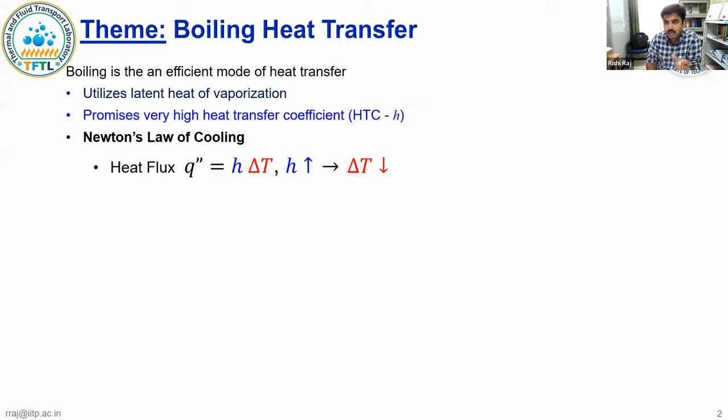So the theme is boiling heat transfer, and it's very clear to all of us that we primarily work towards Newton's law of cooling, and the whole idea is to increase the heat transfer coefficient such that we can dissipate a particular amount of heat at very small temperature differences. In this regard, I don't need to prove to this community that we get the highest possible heat transfer coefficients using phase change heat transfer such as boiling and condensation. There are many applications about which also I may not need to brief this community.

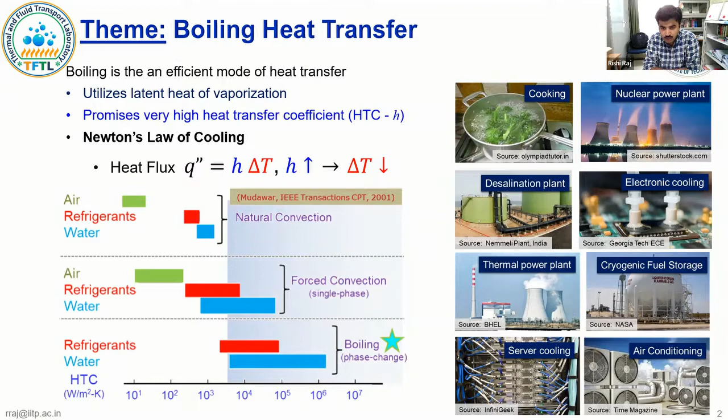So let me directly get to the point, and the point is the boiling curve and the boiling regime. We are very familiar with our typical boiling curve and the heat transfer coefficient curve at the bottom, which is the heat transfer coefficient on the y-axis and the wall superheat on the x-axis.

Typically we characterize our boiling regimes as natural convection, followed by onset of nucleate boiling, and then the nucleate boiling regime up to the critical heat flux. Beyond the critical heat flux, all of us are very familiar that we have a thermal runaway, and many a times this is not desirable, or in most times it's not desirable, because you lose the advantage of the high heat transfer coefficient mentioned in the previous slide, and obviously there are failures due to thermal runaway.

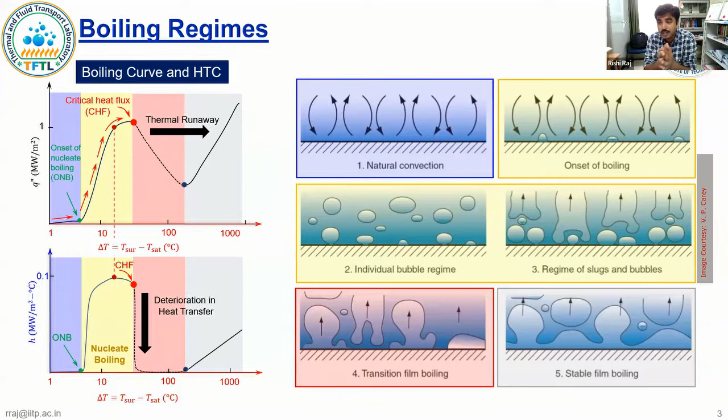The actual nature of the boiling curve in the transition boiling regime depends on what boundary condition you impose at the heater surface, whether it's a constant temperature boundary condition, constant heat flux, or something in between, like the case we have where we have a large thermal mass.

Most of us are working towards the fact that we want to be in the nucleate boiling regime, and we want to do two things: maximize the heat transfer coefficient that we see in the nucleate boiling regime, and extend this limit, the critical heat flux point, so that we can get the advantage of the high heat transfer coefficients up to very high heat flux.

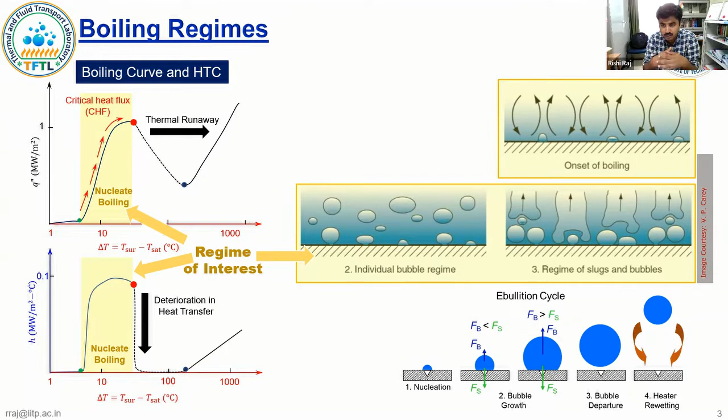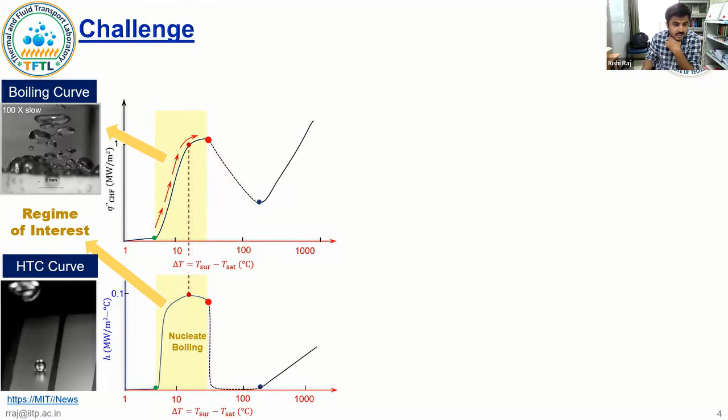In this regime, primarily the heat transfer is due to the ebullition cycle, which is the cyclic process of bubble nucleation, growth, departure from the heater surface, and rewetting of the heater surface. The same is shown here, where we start with ONB, then we have the ebullition cycle, lots of bubbles nucleating, forming on the bubble, departing from the heater surface. There are other events such as coalescence, and this is primarily responsible for giving us the high heat transfer coefficient until we encounter thermal runaway due to critical heat flux, where we primarily have a vapor blanket covering the heater surface.

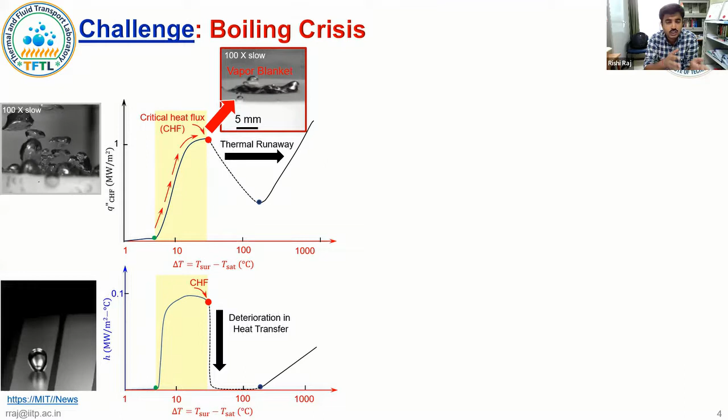The fascination with increasing the critical heat flux, figuring out when it happens, whether we can predict it, and trying to achieve the high heat transfer coefficients during boiling has kept it still as one of the most relevant topics in thermal heat transfer.

I did a survey sometime last year, and we figured out that there are at least 3 Scopus-indexed publications every day as far as boiling heat transfer is concerned.

If you want to guess why that is the situation, look at this plot, a nice compilation by Moze et al. in Applied Thermal Engineering, where they tabulated data regarding critical heat flux and wall superheat for boiling on a normal polished copper surface with water as the test fluid.

What do we see? The heat flux values reported in literature vary from around 500-600 kilowatts per meter square to even 1600 kilowatts per meter square, or 160 watts per centimeter square. Similarly, the wall superheat varies from around 12-13 degrees centigrade to maybe 37 degrees centigrade.

This is primarily the reason we are still so far behind in boiling heat transfer. It's very difficult to predict at what heat flux the boiling crisis will be observed, and at what temperature. Considering that a boiling crisis is an issue where after that you don't have control of the thermal transport phenomena, trying to figure out where boiling crisis happens, or just delaying it, has been the state of the art of research in this field.

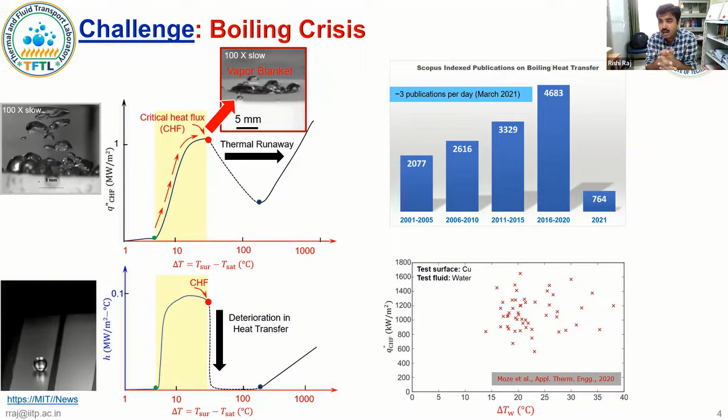So if we try to recap why we have so much uncertainty: all of us attribute it to the fact that boiling is really a multi-scale problem. We have to go from the size of nucleating bubbles to the size of the heater surface, which can span 3 to 4 orders of magnitude.

Boiling is sensitive to a large number of parameters. We have fluid flow, heat transfer, multiple phases involved, which makes the whole thermofluidic transport associated with boiling complicated. It's also very sensitive to practical subtleties. Many times we do experiments in the lab, and if we're not careful with contamination and other issues, the heat transfer numbers we get change significantly.

There has been a nice compilation by Professor Mudawar, who showed that if you use correlations like the Zuber correlation or Professor Kandlikar's correlation, which corrects for contact angle and inclination, and other correlations too, the best match you can get between experiments and predicted heat flux is typically of the order of 40 to 90%, meaning the uncertainties are very large.

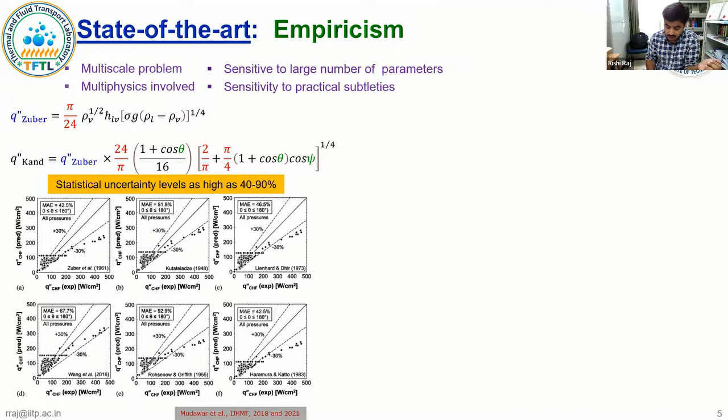Since we are not able to well characterize the boiling critical heat flux, we cannot pinpoint a heat flux number or a superheat number. So the approach has been: let's delay the boiling crisis so we're sure we're away from critical heat flux and can operate in the high heat transfer nucleate boiling regime.

There has been lots of work, and I can't do justice citing all of it, but primarily the principle is to use fancy micro/nanostructured surfaces, with the idea that you can improve rewetting and achieve higher critical heat flux as well as higher heat transfer coefficient.

But the issue is that while you're delaying the boiling crisis, the highest heat transfer coefficient you typically get is towards the critical heat flux itself. So you still can't operate in that regime because of the uncertainties associated with the critical heat flux value. If during device operation there's contamination or fouling of the heater surface, what you thought was a safe limit may not be, so we have to adopt a very high factor of safety, which means we still operate in the low heat transfer coefficient nucleate boiling regime.

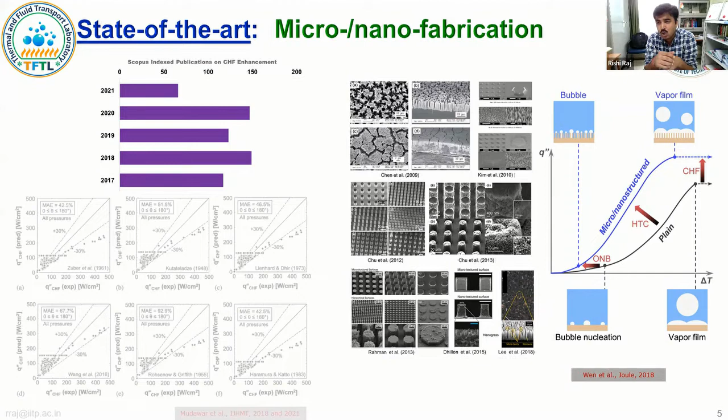Just to give a brief overview, there has been a surge in activities dealing with machine learning in boiling, and the number of publications coming out reflects that. Much of the work in this field uses machine learning tools to analyze boiling data better.

For example, here is work from Mousavi et al., where they took boiling images in various regimes and trained an image recognition algorithm, particularly a convolutional neural network. What they intend to do is have the algorithm directly tell, given a new boiling image, whether it's in the nucleate boiling regime, whether boiling crisis has happened, or whatever the boiling regime is.

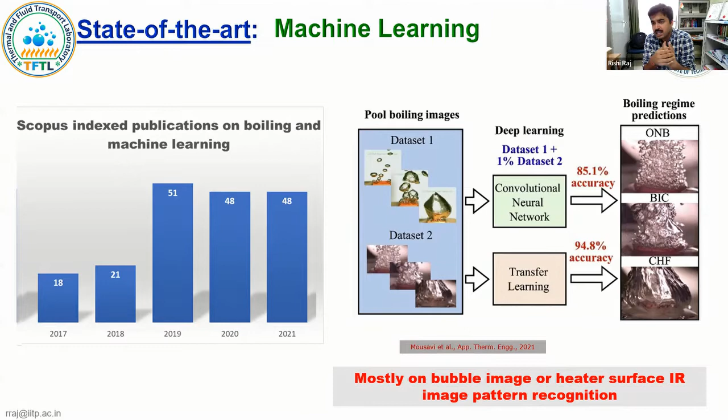Similarly, there are other works where people have tried this—for example, Su et al. looked at boiling images using a high-speed camera and trained a network, with the whole idea being to predict bubble parameters. Matteo's group looked into IR images from underneath, aiming to predict bubble growth time or nucleation site density instead of using expensive computational tools. They've shown that machine learning algorithms can drastically reduce computational time while remaining very accurate.

This is some of the new trend in this direction, but the whole idea is to understand the boiling mechanism so we can better predict the critical heat flux as well as the superheat at the critical heat flux, such that in future we can have control over boiling critical heat flux and deploy mechanisms to minimize thermal runaway.

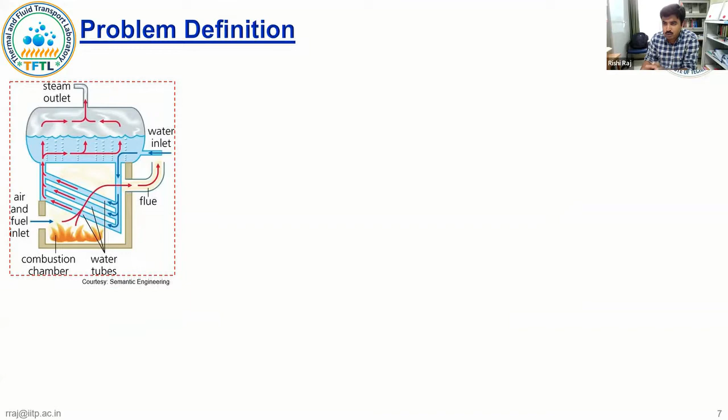We look at this problem through the purview of electronic cooling, but also for larger systems like a typical boiler. At this point I'm not doing flow boiling, but in a typical boiler you have tubes and then the drum. The issue is that if you're talking about boiling crisis and want to pinpoint it, it's very difficult because you may put temperature sensors at a few locations, but the failure may happen somewhere else.

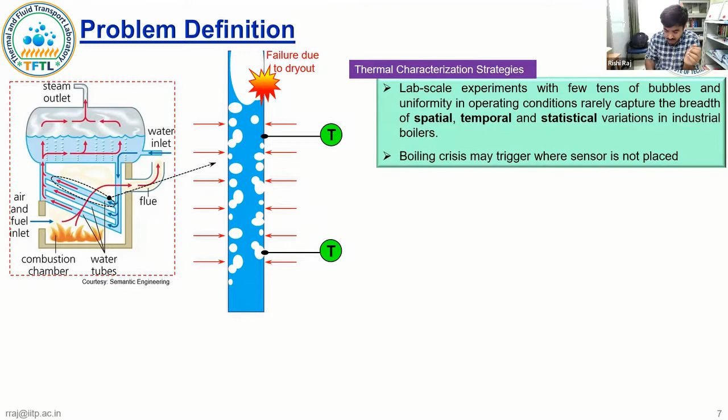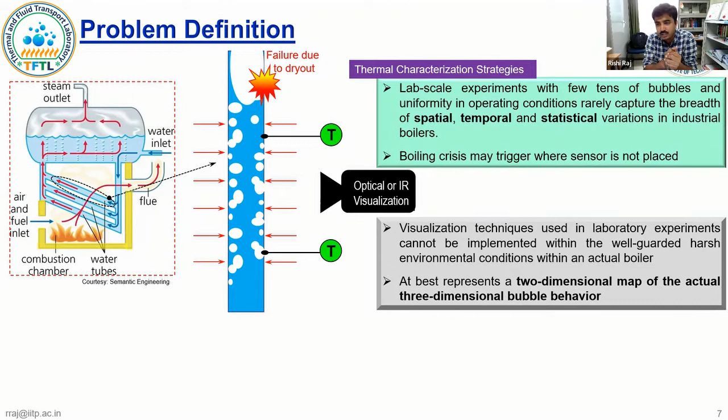Because it's spatio-temporally distributed, during experimentation we have access to bubble images, but in typical experiments we may not have access to bubble behavior to predict anything. So we have to rely on thermal data, or we think we can hear the sound of boiling, which may give us information that is otherwise difficult to obtain in practical applications.

Why are we interested in the sound of boiling? Because over the years we've recognized that it is the bubble behavior which dictates the boiling phenomenon and hence the heat transfer. The sound of boiling is a direct manifestation of bubble behavior, so in a way it imbibes statistically as well as temporally resolved information.

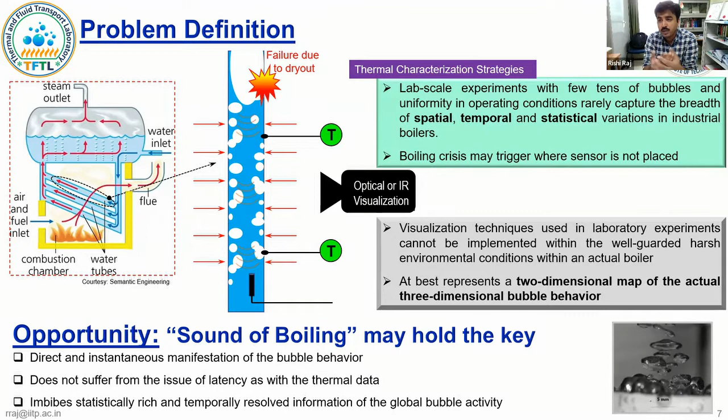Another issue with visualization: even if you can visualize the boiling behavior—imagine a circular heater—you're only able to see the peripheral view of the bubble behavior, and what's happening at the center of the heater isn't clear. However, with sound, all of those hundreds or thousands of bubbles—how they're oscillating, sometimes coalescing, sometimes departing from the heater surface—all of that is captured in a simple time series signal, for which we have a lot of analysis tools. Particularly with machine learning tools, maybe we can extract much more information, and that's our aim.

I hope you're able to hear the sound that's playing in the background.

Here I'll give a brief introduction regarding the sound from bubbles. Whatever we hear, whether it's a raindrop or the roar of the surf, the sound is primarily due to the formation and collapse of bubbles. There are also many other events, such as coalescence, which contribute in different ways.

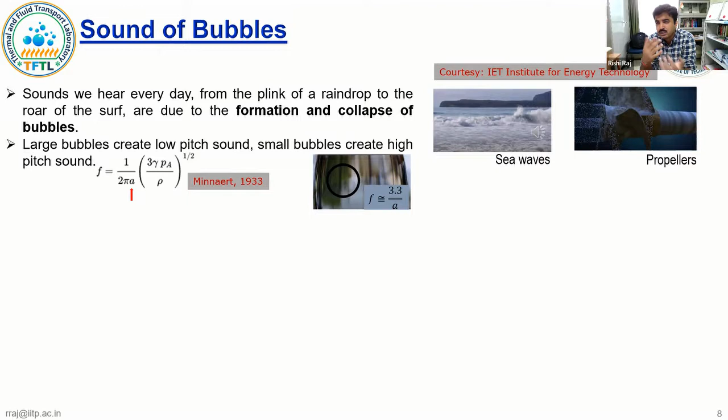Minnaert, back in 1933, characterized through single bubble experiments that the sound we hear from bubbles is inversely proportional to their size—large bubbles produce low pitch sound, and vice versa for small bubbles. However, this was a very simplified experiment, primarily with air bubbles, and we want to translate this knowledge to boiling.

We are not the first to speak about the sound of boiling—there was a seminal paper published in 1955 in Science by Westwater et al., where they showed that if you plot heat flux versus the sound of boiling (the axes reversed here), the intensity map of sound, measured in decibels, follows a behavior very similar to the boiling curve: in the nucleate boiling regime it increases, peaks, and then the curve reverses.

However, there has been a lot of follow-up work after that, and probably due to lack of analysis tools as well as unavailability of such advanced sensors as we have today, it was primarily concluded that boiling sound is more like white noise, and hence you cannot get features here. White noise means you will have equal amplitudes at various frequency levels, so it's very difficult to figure out the frequency signature. That was initially concluded, and it was attributed to the fact that there are so many events happening in boiling - so many bubbles. You have nucleation, cavitation, surface popping, oscillations, coalescence, that it's very difficult to figure out what is happening there.

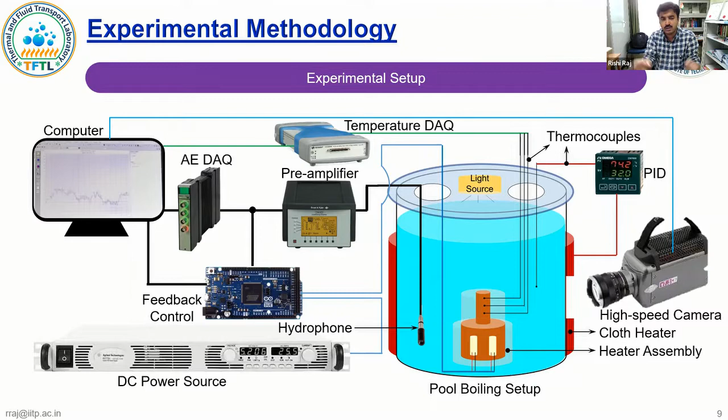We do boiling with pure water. The fluid is typically open to atmosphere, so for all the results you will see here, the amount of dissolved gas depends primarily on the subcooling we are using. We employ a high-speed camera because we want to do simultaneous audio, visual, as well as thermal characterization. And then we have a hydrophone, which through a preamplifier and a DAQ acquires all of the acoustic data. In the future, once we have characterized the behavior of the boiling sound, we also implement and control through a microprocessor, and all those details will be discussed later. So this is primarily our experimental setup.

We do experiments on two types of surfaces: simple, plain, polished, machined copper surface, typically our heater is roughly around 14 millimeter in diameter. And we also have nanostructured copper surface of the same size, where this is the typical grass-like nanostructure, which has been extensively used in boiling. The purpose here is to understand how the sound changes with these nanostructures.

We also vary the boiling fluid. So we have aqueous surfactant solution, for example sodium dodecyl sulfate, SDS, used at the critical micelle concentration, and similarly aqueous solution of ionic liquid, BMIM-OS, at its concentration again at CMC or half of CMC, critical micelle concentration, so below the limit such that the solution is clear.

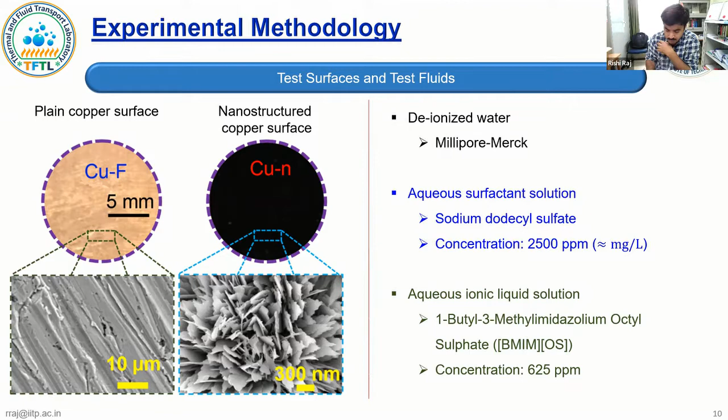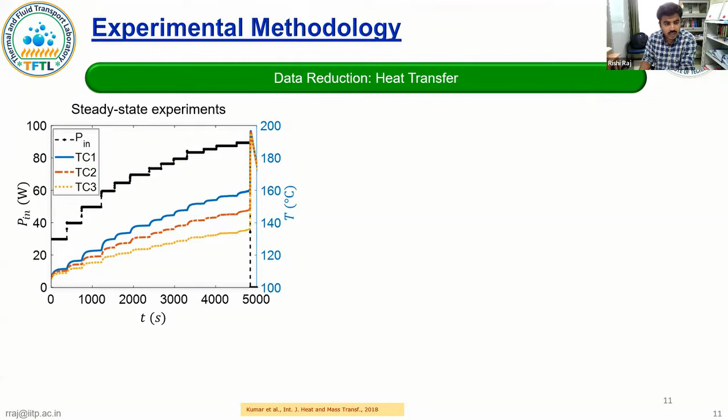The methodology is very simple. We vary the input power, which is shown on the y-axis. We maintain it at a particular level, wait for the temperatures to stabilize to get steady state data, and then switch on the power to the next level. We do this at various power levels until we hit thermal runaway, and we can characterize the whole boiling curve like this.

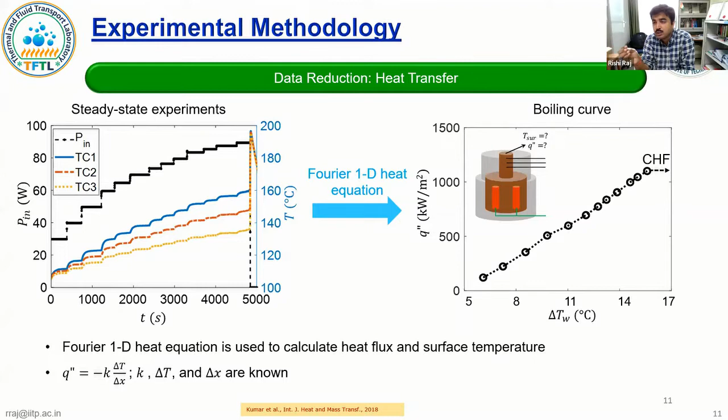And then we also do transient experiments, very slow transient experiments. The idea here is, when you do steady state experiments, you are doing experiments between discrete data points, and right near CHF, either you have data before CHF or after CHF. You really are not able to see what is really happening at CHF. So what is the way?

So the way is that we give input to our cartridge heaters and increase that power at a very slow level, such that we can do inverse heat conduction at all points. We can have a continuous boiling curve with data continuously acquired right from the onset of nucleate boiling to critical heat flux and beyond that.

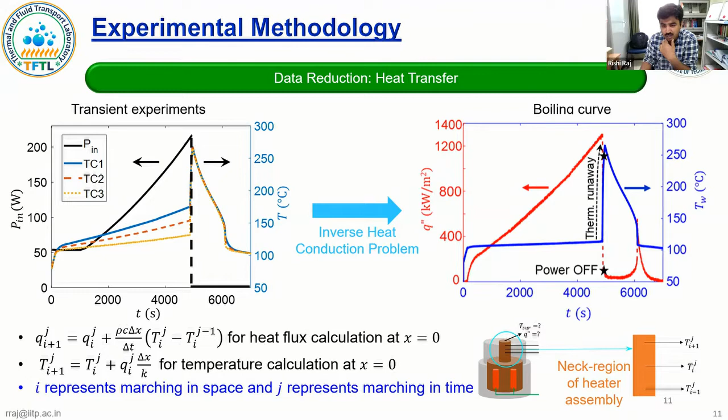Based on the thermal data from the 3 thermocouples, we do inverse heat conduction where we do marching in time and space to back calculate our transient heat flux, and what our surface temperature data looks like. Here we have the critical heat flux or thermal runaway, and you can put these two together to plot our boiling curve, which is this whole curve.

As you see, once we reach 150 degrees centigrade, there is a control logic and the power is shut down. There is still some temperature excursion beyond that because of the thermal mass, but after that the system starts cooling and goes back to the nucleate boiling regime.

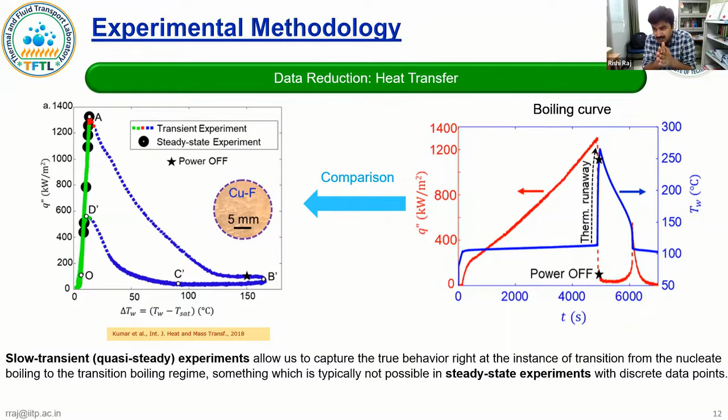I have also plotted the steady state experimental data, which in the nucleate boiling regime matches perfectly well with our transient data, both in terms of the heat transfer coefficient as well as the critical heat flux, telling us that our transient data is reasonable.

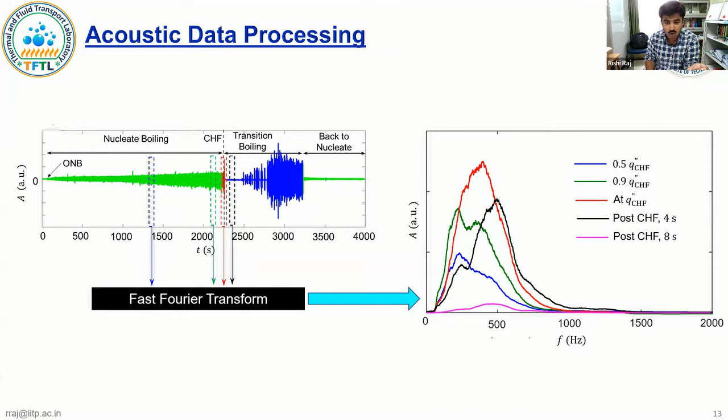So what we do is take these Fourier transforms in various regimes and put them in the form of what is called a spectrogram, where the x-axis is time, the y-axis is frequency, and the color map, showing the decibel level, shows the intensity of the sound.

For example, if I look at this red curve, that is manifested here in terms of a very high peak in this location. So that is how we have analyzed the sound of boiling, so that we continuously get all of the information from the sound.

At any instant, what is the dominant frequency and what is its amplitude, and for that matter, amplitudes at all frequencies.

So now, in the next slide, I'm going to show you data for simultaneous thermal, audio, as well as visual characterization of boiling near the boiling crisis.

Here is the transient thermal data. We have the heat flux varying and going up to critical heat flux. Here is the temperature change. Right at CHF, you have a temperature excursion. The heat flux comes down—this is the transition boiling regime. Somewhere here we switch off the heater, and after that cooling starts and it goes back to the nucleate boiling regime, so there is an increase in the heat flux and the temperature comes down.

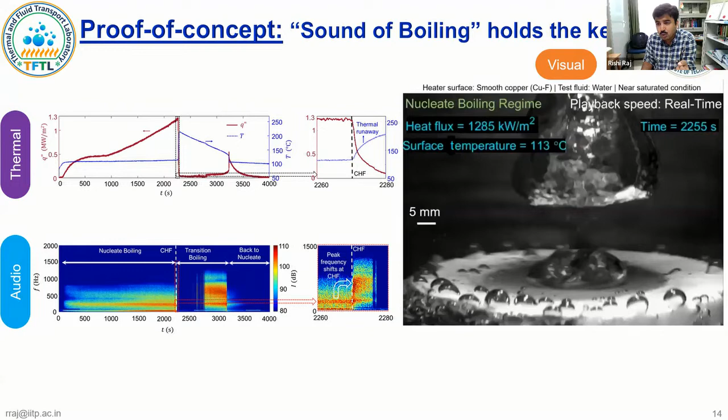In this video, you will see the bubble behavior switch from mushroom to something else. You will at all points have the values of heat flux and surface temperature. Now that I'm playing it, you will see vertical arrows moving through this point. So I request you to please note what happens when we are at the critical heat flux.

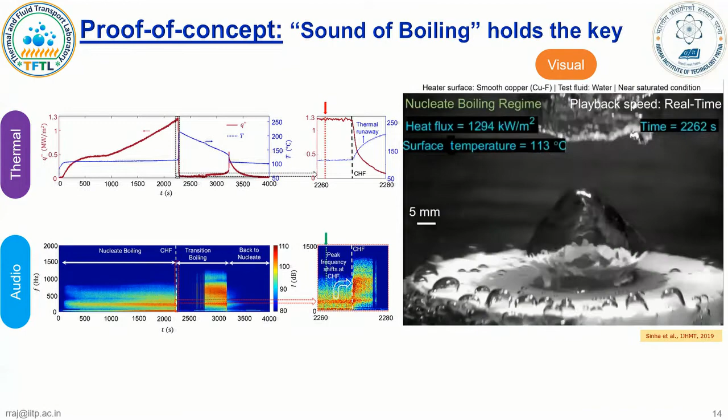Rishi? Yes, Professor. Are you using a pointer? Because we can't see anything. Oh, there it is, I see it now. Okay, can you see it now? Yes, thank you.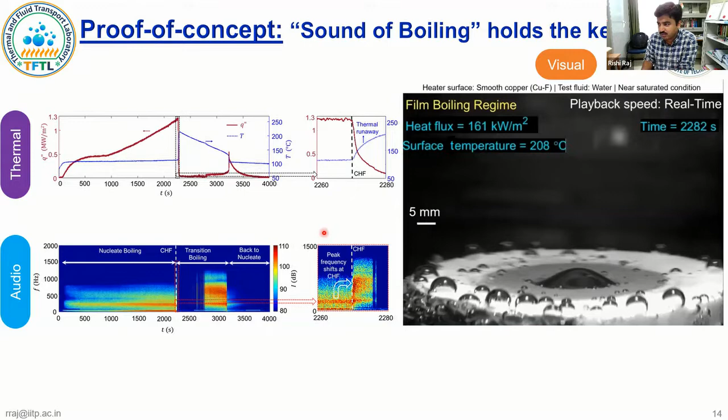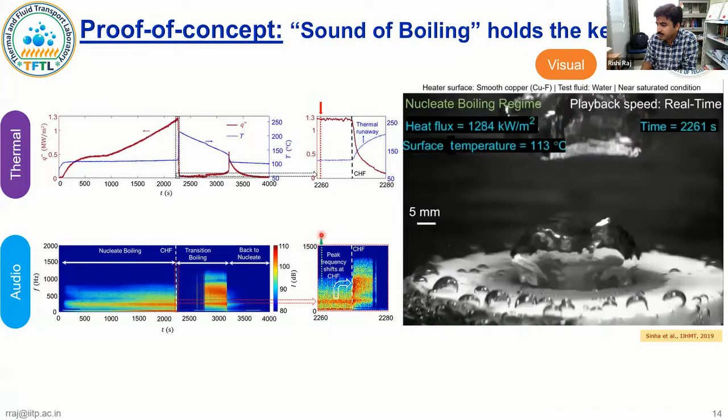So now we are moving along this, and you can monitor the heat flux, surface temperature, and you are hearing the sound.

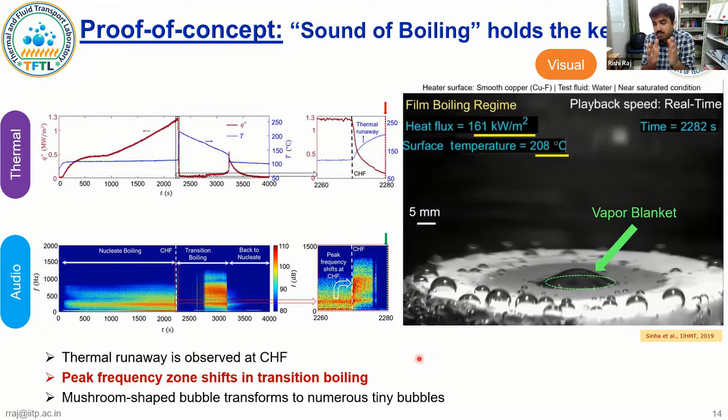This is right from just before the critical heat flux to critical heat flux, and then when the stable vapor film forms. We see a very interesting behavior where there's a transition from mushroom-like bubbles to some sort of unstable vapor film and a lot of micro bubbles emanating from that vapor film, which eventually stabilizes into a stable vapor film as seen towards the end.

During this time, when the bubble behavior changes from the mushroom-like bubbles to the micro bubbles emanating from the unstable vapor film, we see a shift in peak frequency, which was also audible to you. While we primarily focused on the loudness or intensity of the sound, the pitch also changes during this time, going from around 200 to 250 hertz to around 500 hertz or so, the details of which I will show in the next slides.

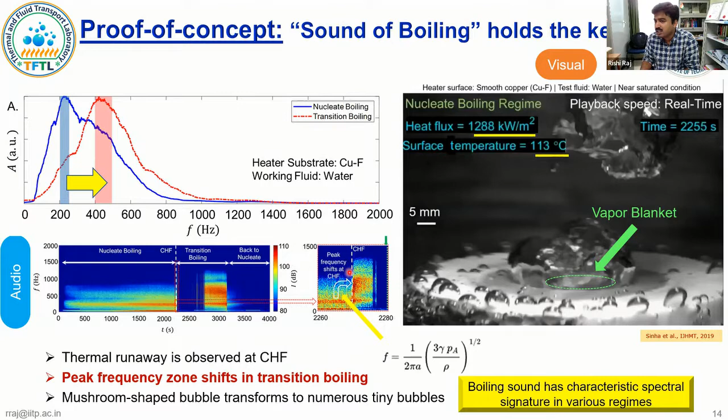So very clearly, the hypothesis or comment made earlier that boiling sound is primarily white noise is not correct, and we see very distinct spectral features, and we wanted to further investigate this.

Our previous experiment is near the saturated conditions. Let us also look at the effect of subcooling. So here are the boiling curves at various subcoolings, with the same condition that when the heater surface temperature reaches 150 degrees, we switch off the power supply.

The black curve was the curve that you have seen in the previous slide. Then we increase the subcooling from near saturated 2 degrees centigrade to 5, 10, 20, 22, 25 degrees. What you see here is that as expected, the critical heat flux increases, but there is a reversal of the boiling curve at higher subcooling values, shown in the zoomed in view here.

We were initially surprised, but when we did a literature survey, we figured out that this is well documented in literature as micro bubble emission boiling. When we looked at that literature, we found that the behavior where we see this unstable vapor film and micro bubbles emanating from it is what is referred to as micro bubble emission boiling.

However, the issue was that people in literature said MEB is only observed at very high subcoolings, probably beyond 20 degrees centigrade, and it's characterized by a thermal signature where the boiling curve reverses, or you see beyond CHF another increase in the heat flux.

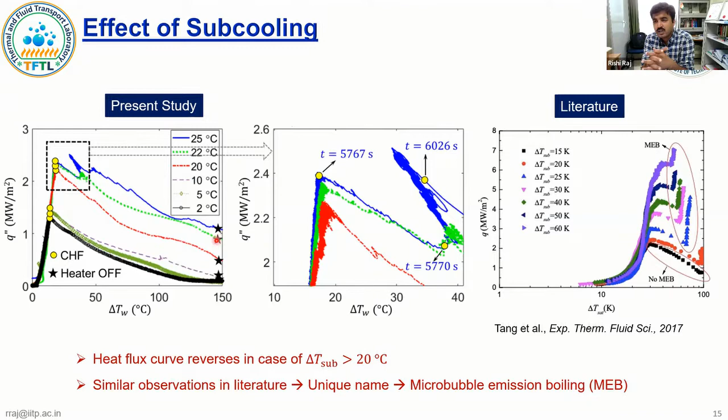So we went into further detail, with the intention of trying to figure out whether we are really seeing MEB or something else.

Here is another experiment at a very high subcooling of 25 degrees centigrade. We are again near critical heat flux, and we would like to see whether we get the same sound behavior that we got earlier.

I have shown you the thermal data for this curve, showing the boiling curve increase, or the heat flux increase, in the transition boiling regime. This is typically characterized as MEB, but we want to correlate the change in sound behavior here with our near saturated experiments earlier.

We also have the spectrogram and the raw acoustic data. Here is the power and heater temperature data. This is near CHF, but before it.

Now this is MEB, what is typically referred to as MEB, and we are moving on this curve. This continues for a while - it's a very long video.

I can play this for more than 100 seconds, and we have a very stable boiling behavior, and this is the region where we see the heat flux increase.

So in terms of what is referred to as micro bubble emission boiling, or MEB, we are actually pointing to that even in our saturated boiling experiments. However, we don't see that reversal of the boiling curve, and in literature also it has been shown that it does not reverse.

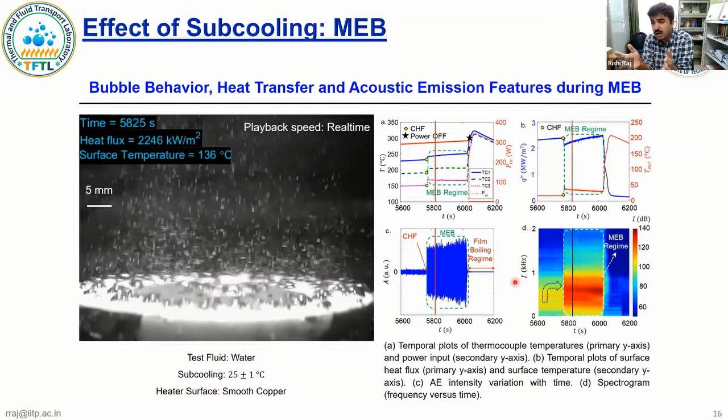So is it the reversal of the boiling curve which is primarily MEB, or is it this fundamental bubble behavior and the sound that we are hearing that is MEB? And if that is the case, then what we are saying is that MEB is observed at all subcooling.

So we further investigated this topic. We looked at all subcoolings - 2 degrees, which was our original near saturated boiling data, 10 degrees, and 25 degrees subcooling. We monitored the frequency behavior, and it is primarily the same: you have a low frequency before the critical heat flux, and there is a jump in frequency. But there was a difference.

The extent for which you see this behavior, the TB regime, is dependent on your subcooling level. So what we characterized here is the subcooling, then the duration for which we see MEB. Please note that we can also get very stable behavior at high subcoolings, but since we are doing transient experiments, our power is continuously increasing at a slow level.

Hence, we cannot see MEB forever even at very high subcooling. But what we realize is that the extent of MEB increases with subcooling. The intensity ratios - in all cases, the intensity in the TB regime is much higher than the intensity in the nucleate boiling regime. And there's also a characteristic shift in peak frequency.

However, at what value - from what value to what value does it shift? For example, it shifts from around 220 to 320 Hertz at very low subcoolings, while these values change to 450 in the nucleate boiling regime to 880 Hertz in the TB regime, or the transition boiling regime, at higher subcooling.

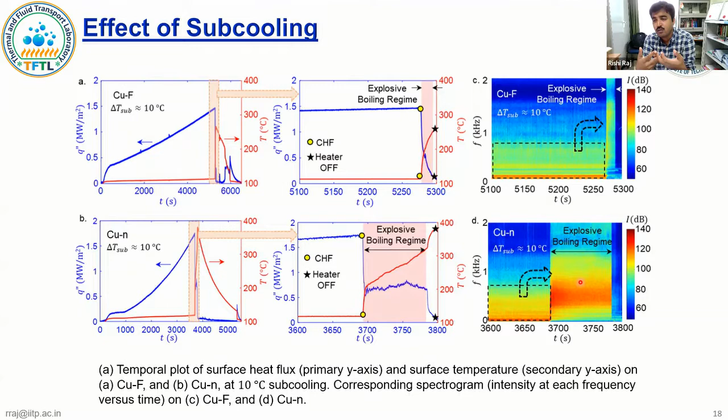For example, subcooling can do the same. Nanostructured surface can allow rewetting of the heater surface even beyond CHF, and that can delay the formation of the stable vapor film. That also increases the extent of MEB.

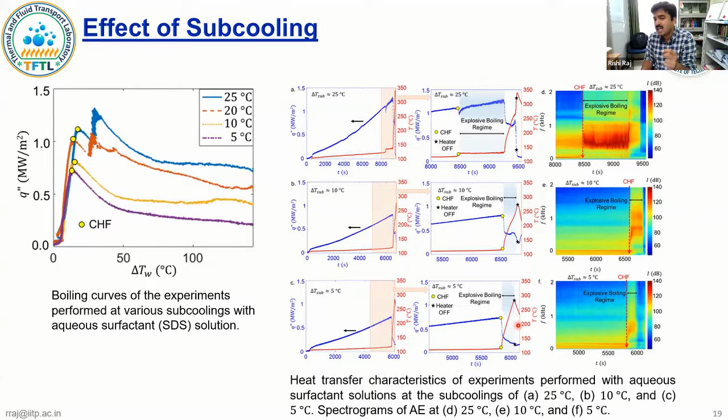And the third thing we tried is, obviously, you can also use surfactants - aqueous surfactant solution. Aqueous surfactant solutions lower the surface tension values, and hence the rewetting is easier. We also saw that you get a much larger extent of MEB, and that extent of MEB also increases as we go from low subcooling to higher subcooling conditions.

So with that, we said, finally, let us see what happens when we come back in this cooling curve. Here is an experiment that we are showing at a subcooling of 25 degrees centigrade, where we really see MEB also in the thermal data during the heating pattern, and then we switch off the heater. And during cooling also, we see multiple peaks in the boiling curve, showing the same behavior.

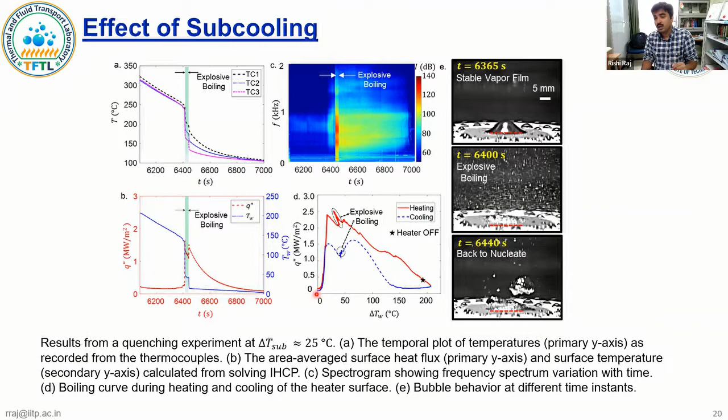So once you have a stable vapor film and you are cooling the heater surface, there is this fight between whether the vapor film wants to be stable or unstable. During this time, there is an unstable vapor film from where microbubbles emanate. You see that kind of behavior again during quenching experiments. And then it comes back to the normal boiling behavior.

So with that, we concluded that there are very definite spectral features of the sound of boiling in various boiling regimes. You can characterize the boiling crisis or critical heat flux with the sound of MEB, micro bubbles that emanate from the heater surface. And two things happen: the intensity of the sound increases, as well as there is a shift in the peak frequency.

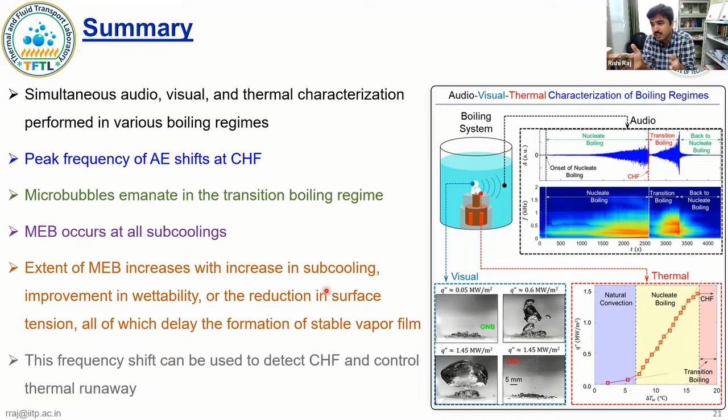And the whole idea was, can you use this peak frequency to detect CHF and arrest thermal runaway? So that was our next work.

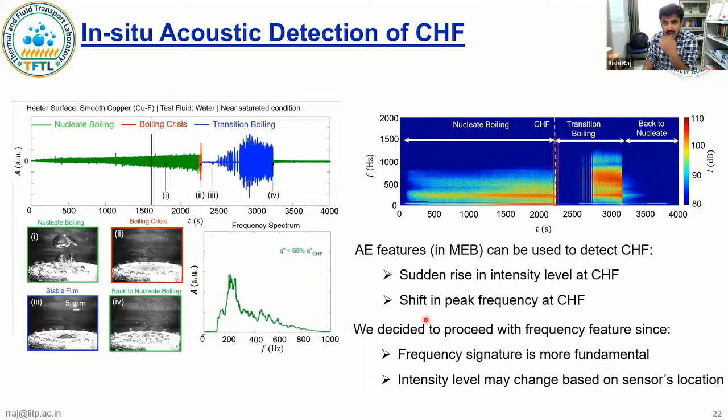What we wanted to do was look at this critical heat flux, where there will be a change in the spectral behavior, which I have already shown earlier. And we want to use this along with a feedback circuit.

So what we are doing here is acquiring that sound of boiling and monitoring the peak frequency. As soon as there is a sudden shift in peak frequency, we switch off the power to the heater surface, and we want to see whether this really happens autonomously in our experiments.

We want to notice how much we can arrest the thermal runaway, which was previously based on just a cutoff when a particular thermocouple temperature or heater surface temperature reached 150 degrees centigrade.

So here is the result. In this experiment, we did transient experiments shown in brown, and as soon as we reached CHF, there was a shift in peak frequency. Our total data acquisition time, because this is live, is roughly around 1 second, and we observed that after 1 second, the system automatically cut off the power.

But since we had already hit the critical heat flux, and there's a lot of thermal energy stored on the heater surface with vapor film formation, we still saw some thermal runaway, but it was definitely 30 to 40 degrees centigrade lower than the previous case, and the boiling curve reversed again.

So very clearly we were convinced, and I'm only showing the data from one kind of experiment here. We did it on various different types of heaters, and we were always able to arrest the thermal runaway.

So it was a success, but not a complete success, because you are still only detecting critical heat flux after the damage has happened, trying to minimize the extent of damage. The eventual aim should be an advanced prediction of the boiling crisis.

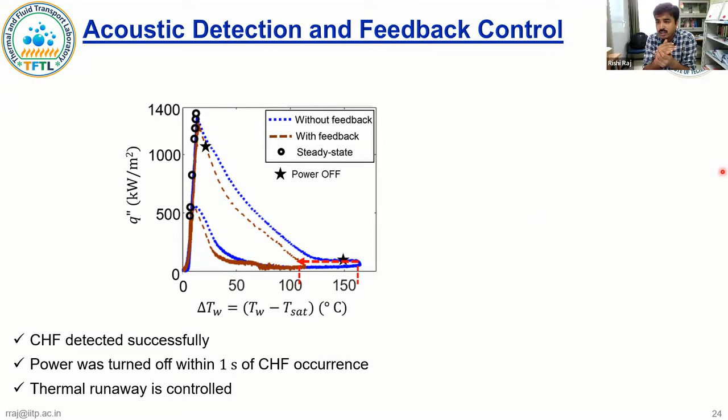What you would notice is this simple rule-based feedback, where once the frequency exceeds a particular value you switch off the circuit, needs input from the experiment, because where this cutoff frequency has to be set depends on what fluid and heater surface combination you're using. So it needs some input from experiment and is not very convenient.

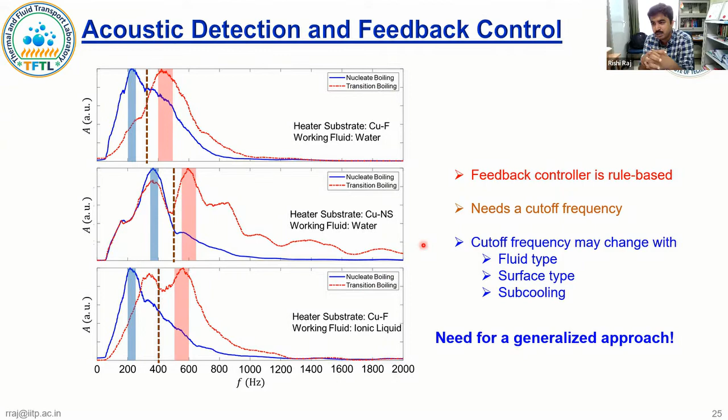So can we generalize this approach? We started moving in that direction. Let me just quickly get to the point.

The whole idea would be to shut down the system just before critical heat flux, so that you do not have this thermal runaway. And not only that, in future, instead of shutting down the system, incorporate some additional cooling mechanism so that you can still operate in this high heat transfer coefficient regime without the issue of thermal runaway.

And that's what I will show in the next few slides. I'll take hardly 5 minutes and then end my talk.

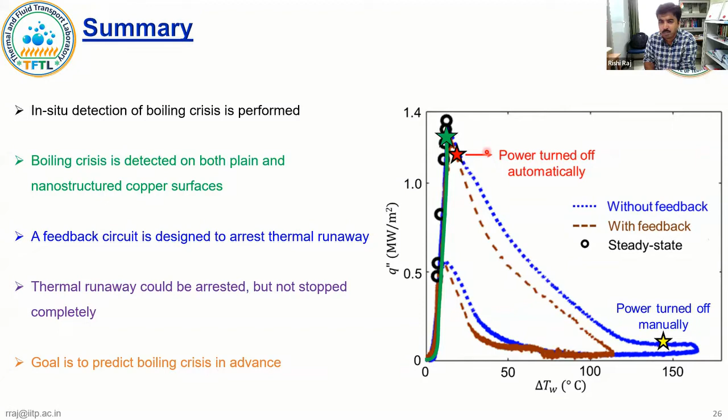This was the time during March of 2020 when lockdown was imposed all around the world and we were not able to do any further experiments. Then my student came back to me and said, can we actually use some of the machine learning tools in the background which I have described earlier?

His inspiration was primarily from a study on characterizing the size of a crowd. Typically, the size of the crowd, when characterized using only webcam images, is not so accurate. However, if you have a few microphones and couple it with the sound you're receiving from the crowd, you can do a very good prediction of crowd size, even at night or on a cloudy day.

So he simply said, why can't we use the sound of boiling along with machine learning tools to predict our boiling regimes and eventually go for advanced prediction of the boiling crisis?

To this end, we used a very simple tool which exists in MATLAB and is open for anybody to use. This is speech command recognition using deep learning, particularly the convolutional neural network.

The whole idea is you give a lot of training data, 1 second of audio for different words. For example, here is the audio of 'yes', and there's maybe 500 such data points. Similarly, audio of 'right', and this is some unknown audio. The code converts this audio into a spectrogram and then uses CNN to train a network.

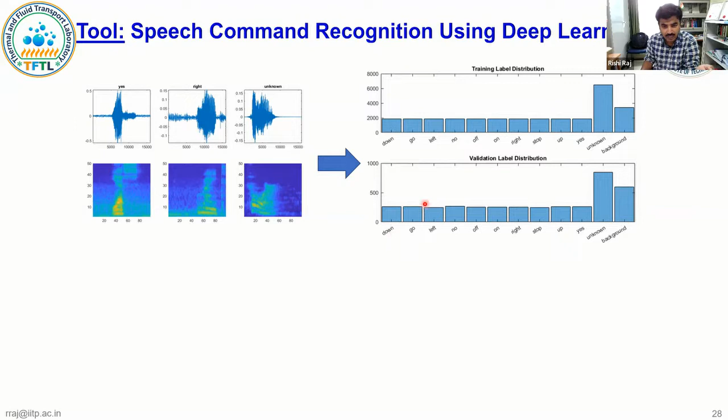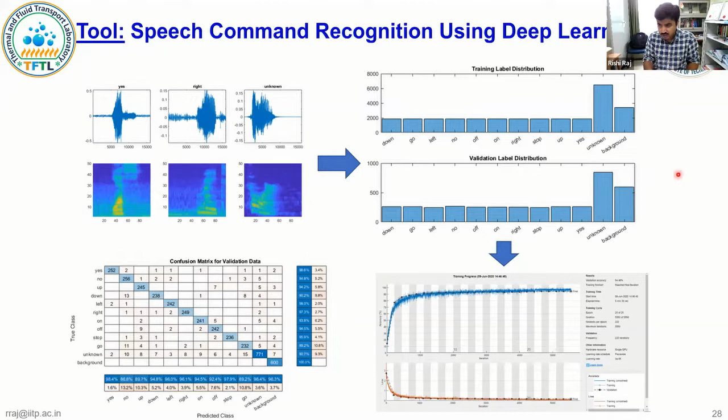This code gives a very good prediction in terms of detecting if you speak a new word—it can tell you whether it's from the pool the network has already been trained on, or if it's some unknown sound. So we took this algorithm and applied it instead to our sound data in various boiling regimes under steady state conditions: natural convection or background, nucleate boiling data, and transition boiling data—these files represent those various categories.

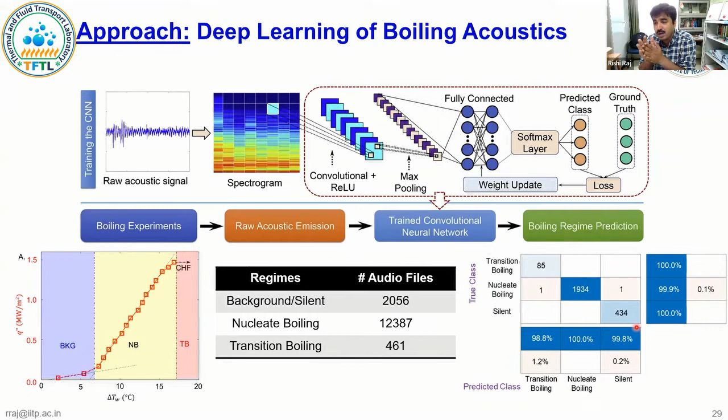We trained the same network and were very happy to get around 99.9% accuracy in prediction. So this whole algorithm seemed to work, and is summarized in this video here, where we are doing transient experiments.

What you see here is the temperature and power input—power is in red, and this is the temperature data. Here is the raw audio, and the processed file in terms of spectrogram is shown here. We are moving vertically along this line.

Here is the prediction class. The algorithm, just by listening to the sound of boiling with no input from the thermal data, is able to tell that right now you are in the nucleate boiling regime, and when you go to transition boiling. And here is where we are in the boiling curve. You will note what happens when we get to critical heat flux.

When we get to critical heat flux, there was a sudden thermal runaway in the boiling curve, and the prediction changed to a new regime, which was the transition boiling regime. Then when it comes back to the nucleate boiling regime, it again predicts that. So this was very interesting to us.

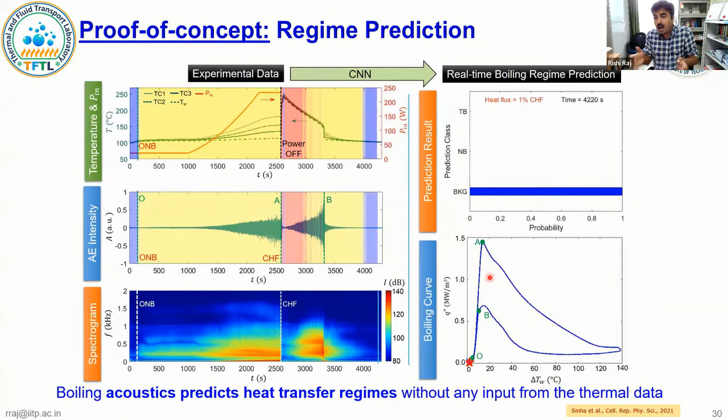This was trained on the water data under steady state conditions, but we were predicting under transient conditions. So we asked: can we check this on other data without training the network for the new samples?

We did this experiment, simply using the network trained on water and pure copper surface to predict the data for a nanostructured copper surface, where the CHF value or wall superheat values are significantly different from our baseline water experiment. And we got very good predictions.

Blue indicates natural convection, where ONB happens, and this more or less matches our experiments. Then we have continuous nucleate boiling regime, and right at the point where we saw this thermal runaway, we have a prediction for the TB regime, or transition boiling regime.

This was great, so we further tested it with an aqueous solution of ionic liquids, where the critical heat flux values are much lower than water and the nanostructured surface, and the heat transfer coefficient is higher—so the same behavior is observed at much lower temperatures. We were again very successfully able to predict when this behavior is observed, which was very interesting.

What was very interesting was that we didn't have any input from the thermal data, except for the original training where we had given some sound—but that training was also for the baseline case of pure water and flat copper surface.

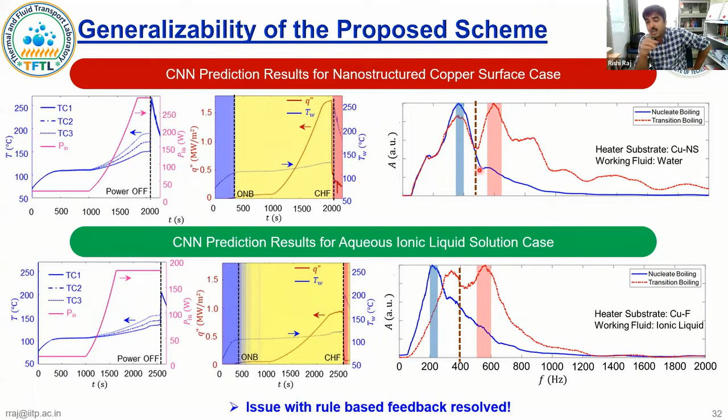We were right away able to resolve one issue: we used this code to simply cut off our circuit and arrest the thermal runaway. We didn't have to depend on the rule-based feedback where we had to give the peak frequency at which we should cut off the power once we observe the critical heat flux. So the first issue was solved.

However, in this case, the code was only telling us that the system should be shut down after CHF had already been obtained. It happened maybe half a second after the critical heat flux, so we still had some thermal runaway, very similar to the previous data.

So yes, while we were able to do away with the rule-based feedback and have a general algorithm, we still didn't have an advanced prediction, which we really wanted to get to.

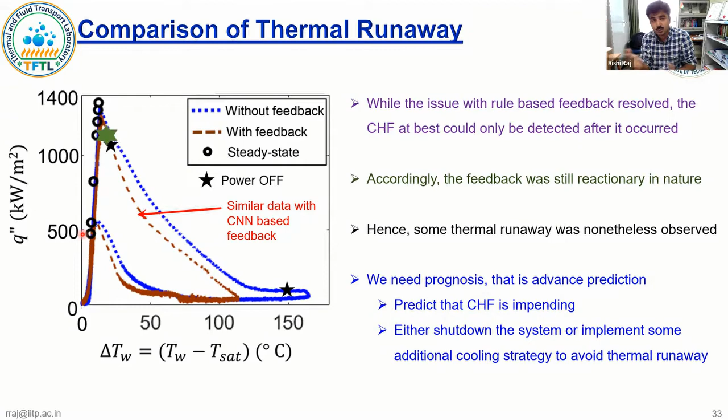So we really looked at our boiling data and read a lot of literature, and tried to identify that very near the critical heat flux, you see this maximum heat transfer coefficient, and after that the heat transfer coefficient starts lowering, and very soon you see this critical heat flux—this regime is called departure from nucleate boiling.

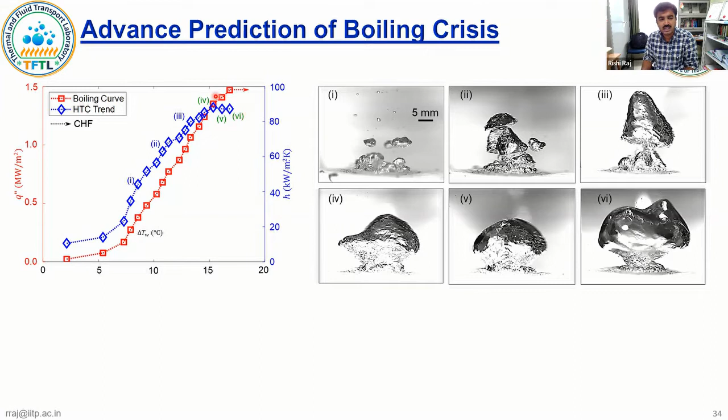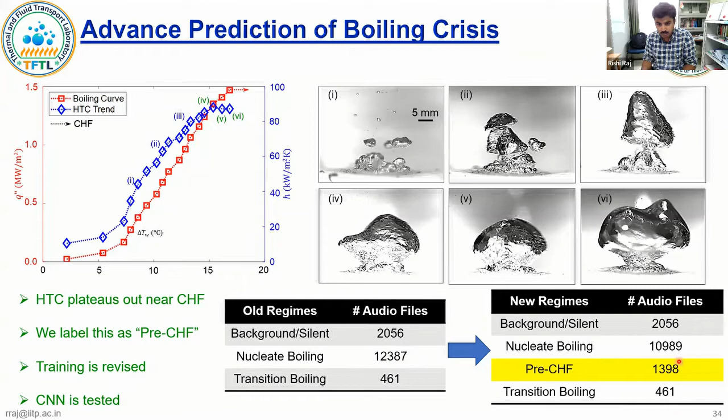So we said that this departure from nucleate boiling, can we call it a new boiling regime? What we did is we took the nucleate boiling regime data, and for just these 3 data points where the heat transfer curve starts to peak and then the value decreases, we named it a new regime, which is the pre-CHF regime, and retrained our network including this new regime. So now this data point is split between these 2 regimes, and we reran our code on the new training network. What we saw is very close to critical heat flux, around 97% CHF.

Again, this is different data, transient data. The code was telling us that you have a new regime, which is the pre-CHF regime. That is basically some sort of advanced prediction. When we run the code, we don't have any input from the thermal data, but you can say we've taken some input from the thermal boiling curve in terms of defining where this peak is coming and what we call the departure from nucleate boiling regime. But still, this was very encouraging.

So we then directly applied the control system here, and we were able to see that the code automatically shuts down the power to the system right around 95% CHF values, and you don't have any thermal runaway, which we wanted in the first place, but were not able to accomplish because in all the other strategies we used earlier, it was detection after the boiling crisis happened, while in this case we were able to completely arrest the thermal runaway.

But just to think more practically, the idea in any practical application would not be to shut down the system. Yes, you can shut down the system and this will avoid damage, but can we have some sort of adaptive control or cooling mechanism induced right now when this condition is encountered, such that you can still operate near critical heat flux, even beyond the critical heat flux values in this high heat transfer nucleate boiling regime? So we have some preliminary results here.

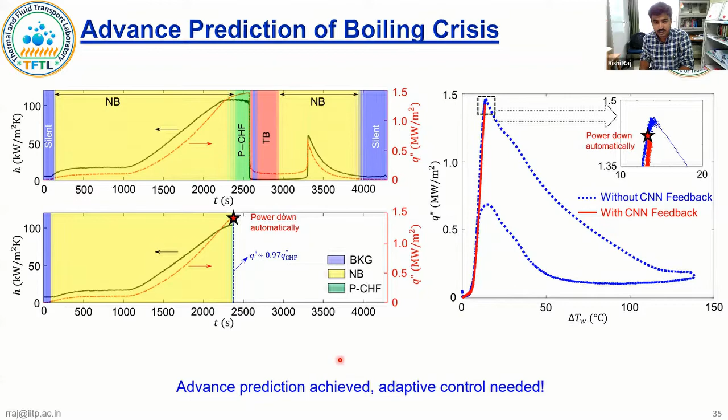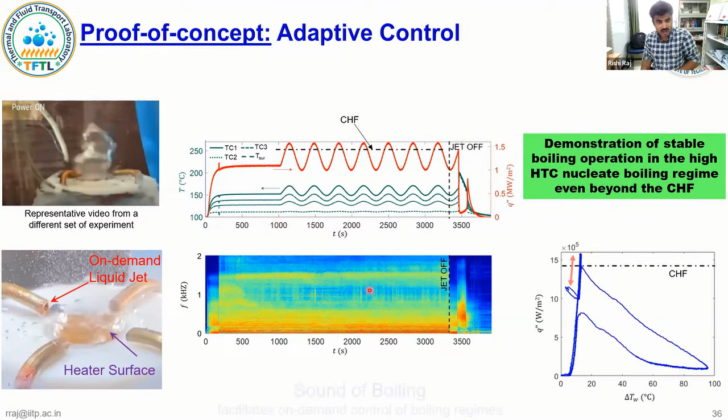So what happens as we are fluctuating above critical heat flux, you can see we can go beyond the critical heat flux value and have an oscillating behavior here without thermal runaway, since the jet switches on as soon as it sees this pre-critical heat flux behavior. Then I will manually switch off the jet, okay? And when we hit critical heat flux, we have a similar thermal runaway that we observed earlier.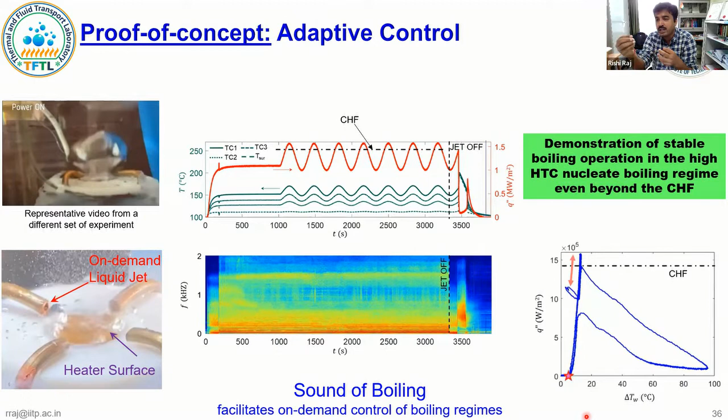So this is very interesting to us. This is just a thought experiment to show what all we can do now that we have this very beautiful way to predict when critical heat flux is observed without relying on heat transfer numbers.

So with that, I will try to summarize. We are using the approach of boiling acoustics in order to predict various boiling regimes and eventually achieve the goal of advanced prediction of critical heat flux. The whole idea is that you can have a reliable mechanism which can give you the confidence to operate in this high heat transfer coefficient regime near the critical heat flux. In case you hit that value, you can deploy some sort of adaptive control or cooling mechanism which can still ensure operation in that regime without thermal runaway.

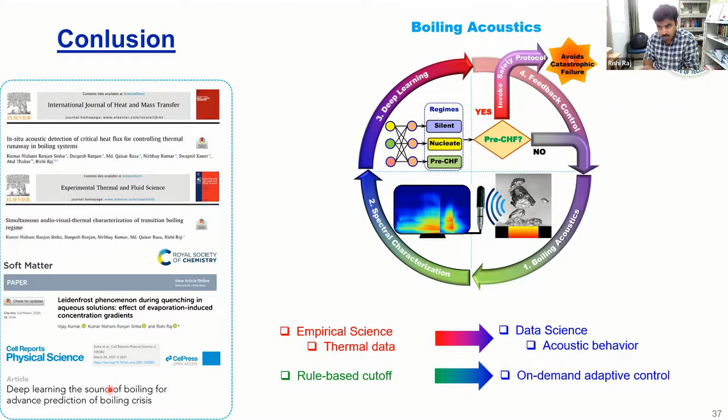We have some publications on this topic in IJHMT, primarily on the detection and simultaneous characterization using audio, visual, and thermal data, in Experimental Thermal and Fluid Science. I haven't discussed the work on Leidenfrost, but that is in Soft Matter. And most of the machine learning part that I discussed is published in Cell Reports Physical Science, where we have also uploaded all of our audio data and code so that everybody can use it, validate it with their data, and baseline and check our approach.